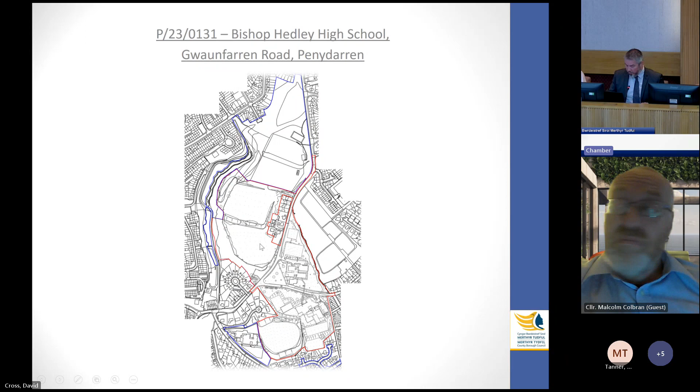The development also includes an area of open grassland to the west of the site. Looking at the plan on screen, you can see this is where the current school site is, in the centre of the plan. To the south is the other classrooms and sports hall, and to the west there's an area of land, I believe referred to as the Greenie, with a sports field and grassland area. The next slide gives a better impression of the development in context.

Planning permission is sought for the phased demolition of the existing Bishop Hedley High School and the construction of a new school within the existing site. The intention is to create a new all-through 3 to 16 school to replace St Aloysius Primary School, Federation St Illtyd School, St Mary's Primary School, and of course Bishop Hedley School. The new school building would accommodate 525 pupils at primary level, 600 pupils at secondary level, and 100 pupils within the nursery.

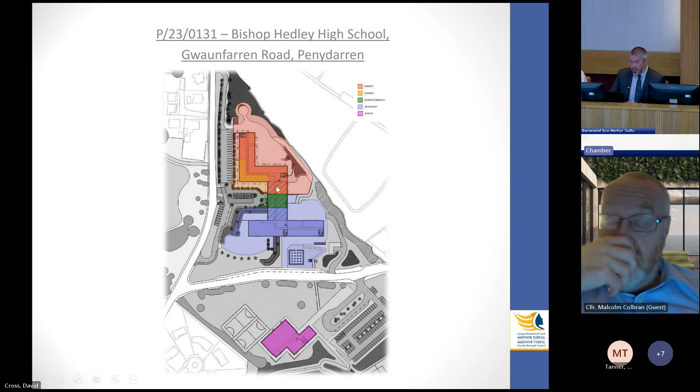The southern part of that building is the secondary school element, with the green bits in the middle being the sort of communal area where you have places of worship and things that link all the different uses, the different elements or age groups together. The areas shaded red and blue are the play spaces around the building, the outside play areas. The purple area is the sports hall, which would be extended.

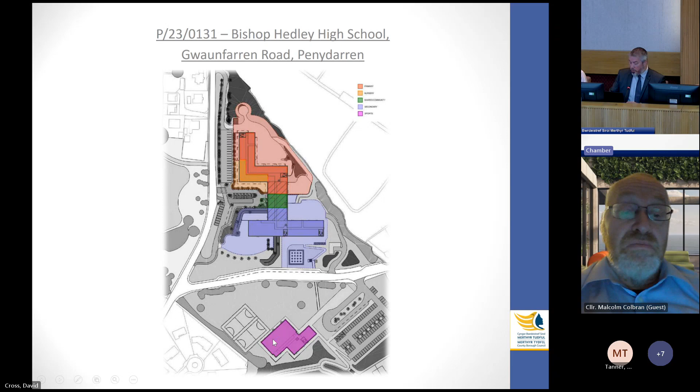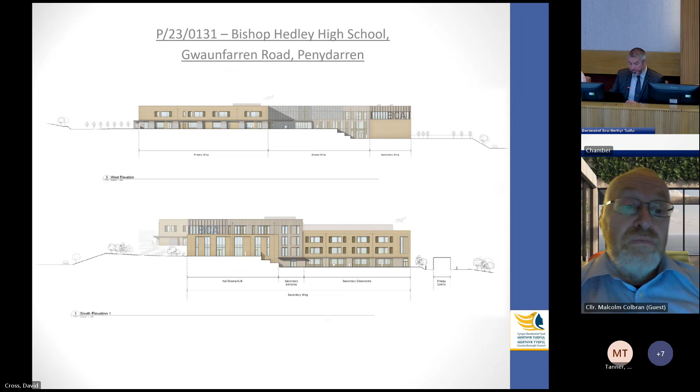As you can see in these sections, there's quite a difference in levels. The north side looks down from where the existing car park is towards Gwaunfarren Road, and there are some steep level differences there. Similarly, the bottom elevation is the east side, the aspect orientated towards the allotments.

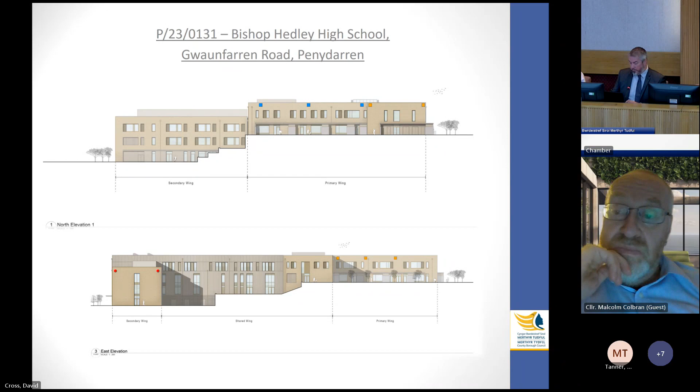This is the design for the improved sports hall. On the plan to the left, the lighter shaded area is the existing sports hall that would be retained and refurbished. The smaller section to the side would be the extended part. As shown on the top right diagram, it would be two blocks linked together with a low-level corridor connecting them. The material finishes would also be improved to match that of the school, so there's cohesion within the development.

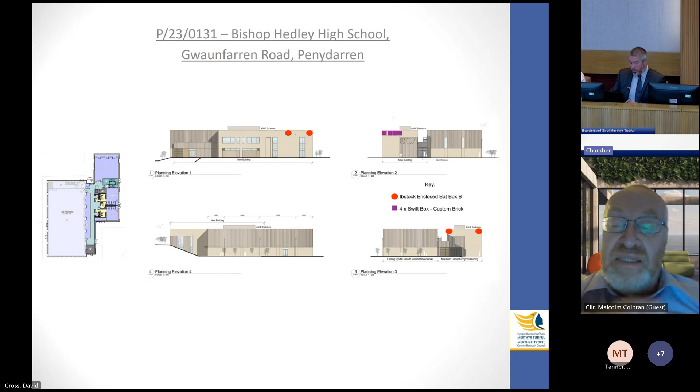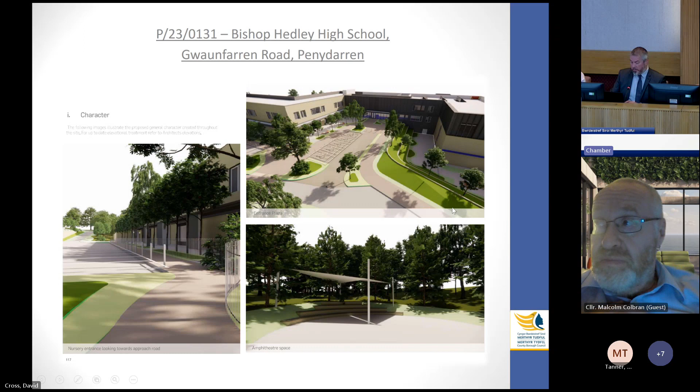These are a couple of illustrations to show what the aspirations are. The picture on the top right shows where the building is recessed, with the main reception to the school and communal area, proposed as a plaza with a disabled parking area near the entrance. To the bottom left is the introduction of planting along parts of the building, near the nursery. There will also be facilities within the school grounds, like amphitheatre spaces, to add to the educational facilities.

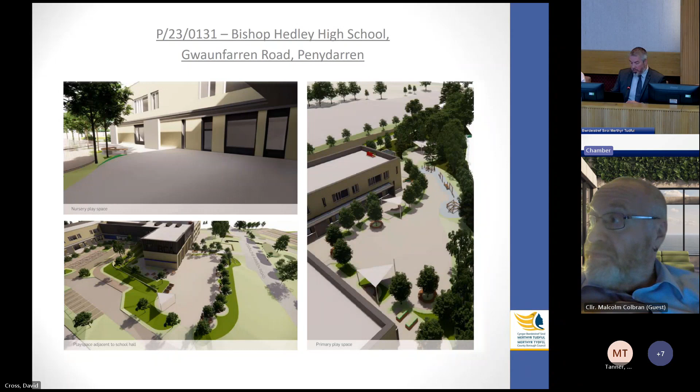There are currently some steps there, but they'll provide an access lift for disabled users. As you can see, the extent of the school in the southern part of the site would all be demolished. The proposed car park is essentially in that area, and the existing play spaces and pitches would be retained and improved, while the existing sports hall would be extended and upgraded.

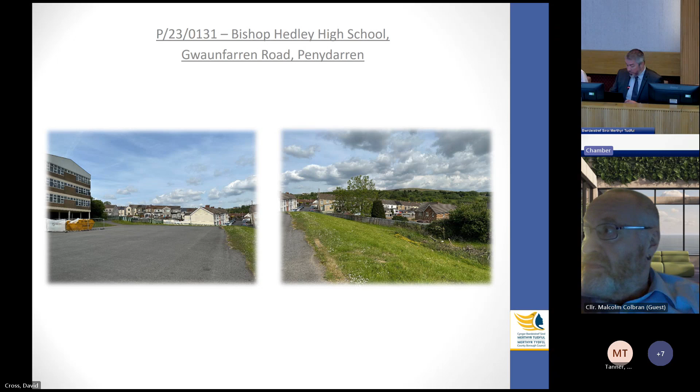Thank you, Chair. I've just got two questions, under the heading ground conditions. The first one, the 5th paragraph down on page 18, refers to land contamination. It says no significant concerns were identified in the SIR. I don't know, can somebody tell me what the SIR is? Site investigation report.

And it refers then to elevated levels of beryllium and 3 PAH compounds. What does PAH mean? P-A-H? PAH compounds. I don't know the exact acronym for that, but that's the reference to the compounds within the site investigation report.

Right. And then it refers to 3 items that were noted in the ground conditions, particularly in areas of made ground. It goes on to say that given the extent of the built development and hard surfacing proposed in the northern part of the site, the SIR considers the exposure to any land contamination would be eliminated. So does that mean these items will be taken out, or will they be completely concreted over, never to be found again?

Those being taken into account, there's only one further question I'd have to ask, which is the playing field. What access is proposed to get there? Going back to my old profession, if it's going to be a rugby field, we need to get emergency vehicles closer to the field rather than having to wheel them up and down a path.

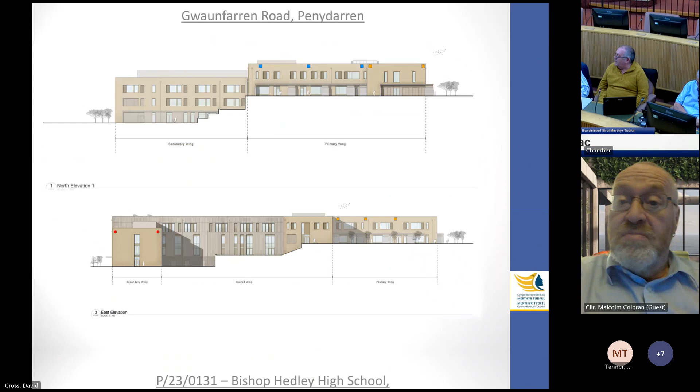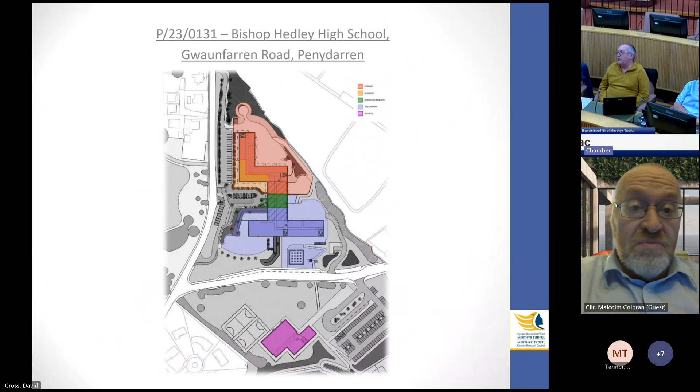Dr. Clive can back me up in saying that some injuries can be made worse by wheeling people head first down a path. And God forbid we get a serious injury on this field, we need to be able to get vehicles on there.

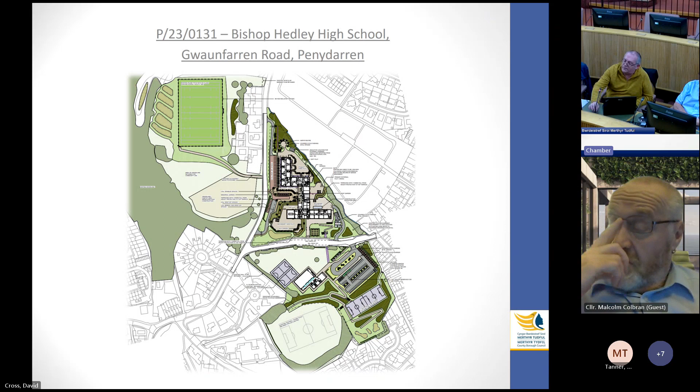To answer your first question about safety on the existing highway, part of the proposals is at the junction where Gwaunfarren meets Galon Uchaf Road, they're proposing to create a tabletop, like a raised platform, to effectively slow traffic approaching that junction, similar to speed bumps. There are a number of crossing points to be provided as well.

There's one sort of here, if I show you on this plan it might be easier. There's one roughly at that halfway point, and another one proposed at the top of the site, as well as crossings between Gwaunfarren Road and the underpass. So there's a number of opportunities there for people to cross safely. But in terms of traffic speeds, I think the main thing is the tabletop, the raised platform at that junction as people are approaching the site.

There is obviously scope within the council's gift to introduce further traffic speed measures along Galon Uchaf Road, or further down, if need be. That's not a problem, and that's something that can be monitored through the highway department.

In terms of the other point about access to the playing field on the west side, it's proposed to create a temporary access where this path is, which would effectively serve the temporary car park and site offices. Once that is all cleared, the intention is to retain that vehicular access, but it's not intended to serve as a permanent vehicular access. It'll essentially be a pedestrian route between the school and the playing fields.

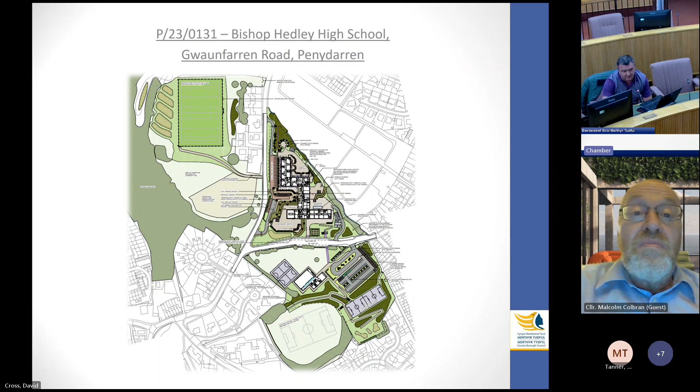But the other thing that concerns me - we're developing emergency access to a rugby pitch for a school, when on the other side of that pitch there are two football pitches with no emergency access, or no decent emergency access, with 200 children a week playing on that surface. We're going to build a rugby pitch for children who'll use it now and again, but not for the community, when with all these pitches I really think we need to be building emergency access for all of them. I wouldn't disagree if there's scope to introduce better access to the other pitches - that can be reviewed, but it's not been put forward as part of this application. Thank you.

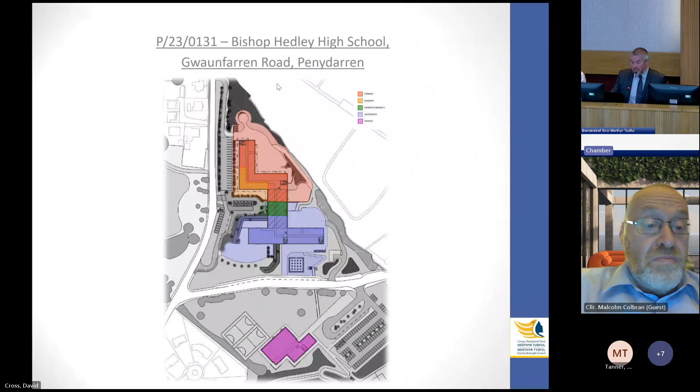Well, there's a number of crossings proposed. I believe the ones crossing the site will be a signalized crossing, as I understand it, to ensure that traffic stops. There's a crossing where the access leads up to the sports field, another further up at Gwaunfarren Road, and within the site itself to the south, there's a zebra crossing and an underpass to the southern part of the site. The one near the sports field particularly needs to be looked at carefully as to the type put in there.

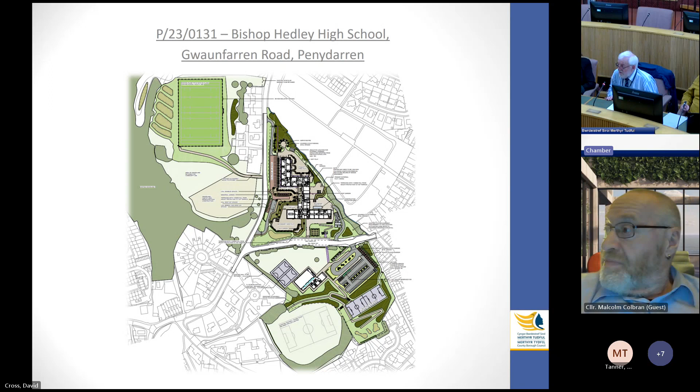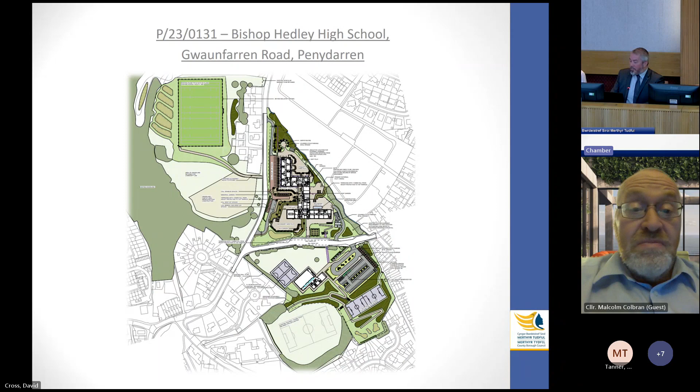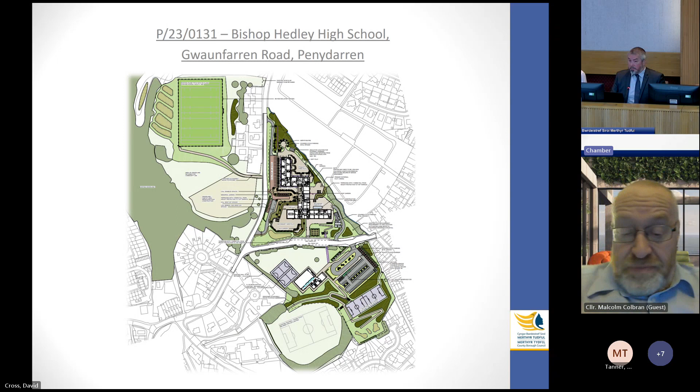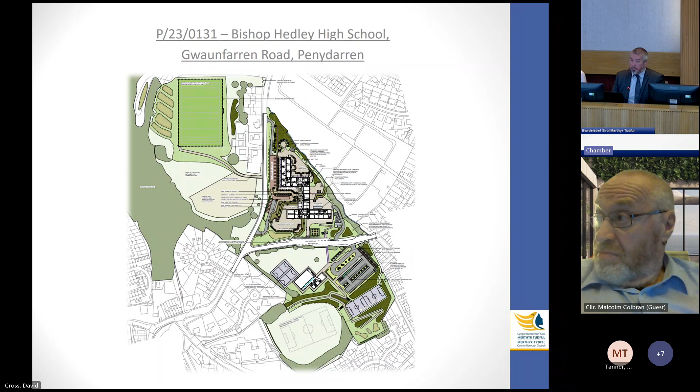So the pedestrian crossing which crosses to the sports field is a puffin pedestrian crossing - that's the one with the zigzags either side. Whilst it's put forward as part of the application, it's under the council's full control as part of the highway agreements. All I'm saying is it needs careful thought, because of the number of youngsters going back and forth there. It's not specified in the application which school groups will use it, so we could have either primary or secondary age pupils crossing that field. There's even more reason to make sure we get that one right.

I agree. Thank you, Councillor Clive Jones. Councillor David Isaac, yeah, thanks.

Can I just pick up on what Clive was saying about the puffin crossing - would there be barriers there, to sort of corral them towards it? I've got a plan here but can't show it unfortunately. There'll be railings to either side of the crossing to stop people just wandering across before they actually get to the crossing point. Yes, thanks very much.

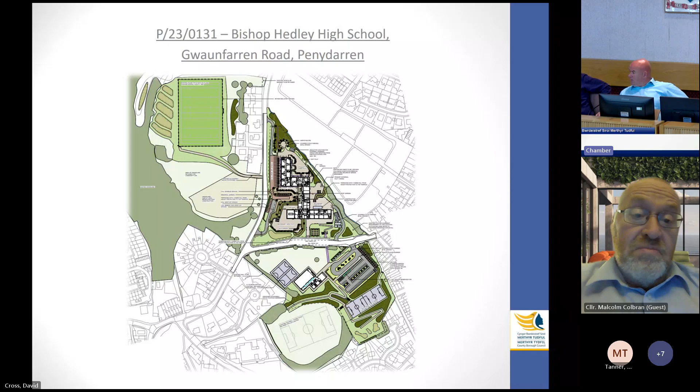Thank you, Councillor David Isaac. Any other members with questions? Okay, nobody's indicating. Not online? No. Any members with comments?

Nobody's indicating. I've just got one, just for the benefit of those watching proceedings tonight or in the future on the council's Facebook channel - I'm wondering why there haven't been as many questions as there would normally be for such a large project. I'd just like to remind everyone that this went through two very heated full council meetings, one on the 7th of December 2021 and one on the 16th of March 2022.

Councillor Clive Jones: to add to that, Chair, there were also pre-planning meetings that took place. The report says there were meetings with residents, which I presume was part of the pre-planning process. As it's a major application, there's a statutory pre-application consultation process with residents, and they had very little response generally, but the response they did have was actually in support of it, particularly from residents backing onto Gwaunfarren Road. There was an opportunity given on more than one occasion for residents to ask questions face to face, and there's one objection which they're entitled to put in. While I'm talking, I just hope all the building works will be held according to plan, and that we don't uncover any untoward problems when they start putting spades and diggers there, which sometimes happens.